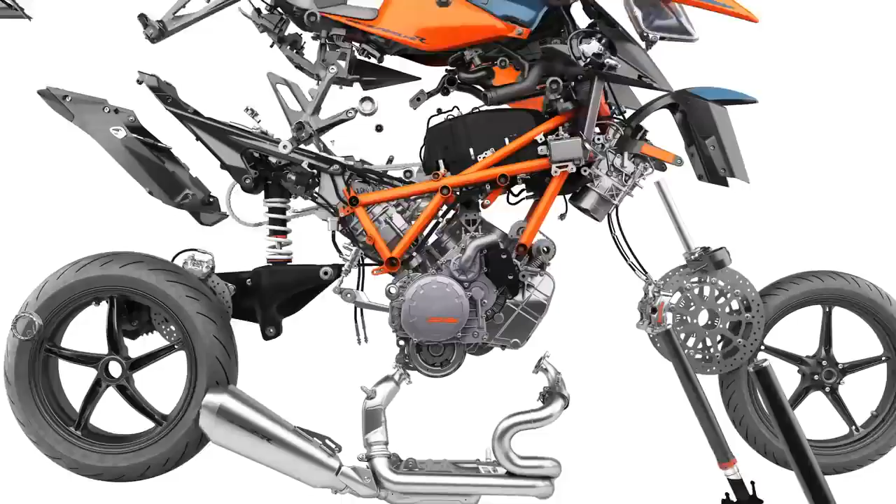Everything about the Super Duke starts with that massive V-twin engine. This is what defines the bike. This is the character of the bike. The pulsation and the power, and most of all, the torque. Figures, very impressive, 180 horsepower, 140 newton meters of torque.

But it's not about the peak figures, because you can design an engine just to deliver a peak figure and really not perform very well everywhere else. Our focus was to make a very performing engine that delivers that torque and that power when you need it.

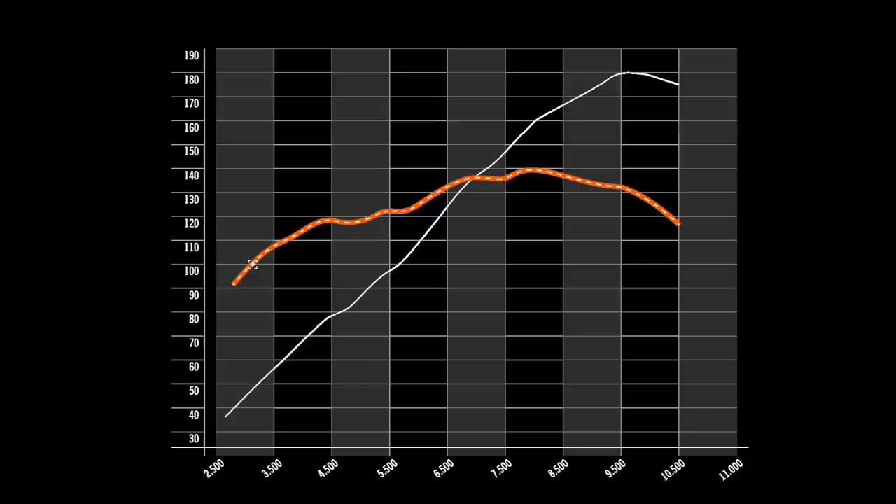If you look at the graph, you can see that we already developed well over 100 newton meters of torque at 3000 RPM. And we pull all the way through to the red line. So this makes the bike super rideable, and it gives you a big advantage on the street and on the track. Adrian, you spent a lot of time riding the all-new Beast on the street. How do these figures translate into street riding?

What I really like and what I really enjoy about the Super Duke and about this engine in particular is that it gives me the flexibility to ride. I don't have to be in exactly the right gear at exactly the right RPM to overtake. I'm free to ride how I want, when I want.

It's a street, so there's always going to be traffic. So I'll be sitting behind the car and I have to overtake in a short time, and I have the flexibility, I have the torque. I can open up and just overtake the car. And if I want to exit a corner, I have the torque, and it's just that excitement. I can't always ride full speed on the street because it's not safe, it's not what it's about, but I can just have fun.

I spent a lot of time on this new bike on the racetrack, and again for me it was a bit of a learning curve. The first couple of sessions out, I did what everyone would expect, which is to go down to second gear for the really tight corners. But because of the massive amount of torque, I quickly realized as the sessions progressed that third gear would probably be the better gear.

And the benefit there for me was really one less downshift going into the corner, and obviously use the torque to drive it out the corner, and again one less upshift coming out of the corner. So real benefit using the torque on both track and street. Big changes on the bike. There was a goal on weight saving.

The goal was 15% weight savings on every part. Of course, it's not possible with every single part, but if we slice 15% off every part, the whole bike becomes much lighter.

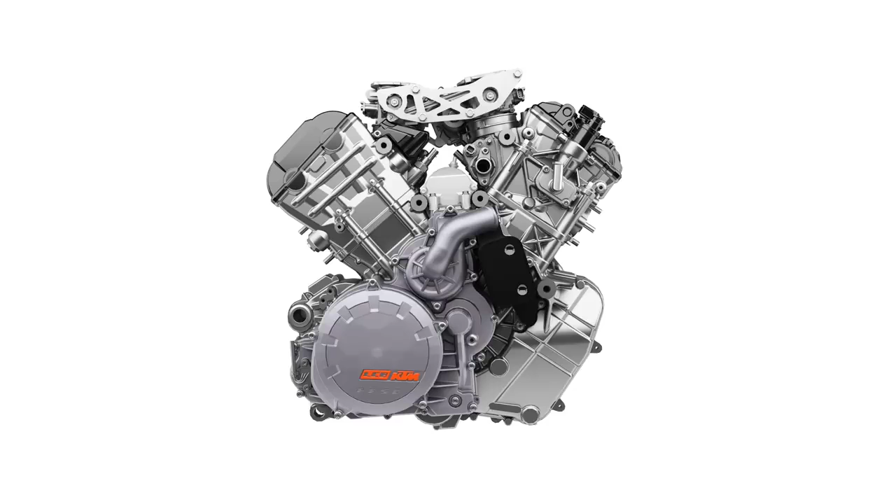Starting with the heart of the engine, one of the parts we looked at for weight saving was the engine casings. We shaved off unnecessary aluminium on the inside, saving about 800 grams.

Another big change is the pivot point in the engine. It's only 5 millimeters, but this has made a big change in how the motorcycle behaves in the end.

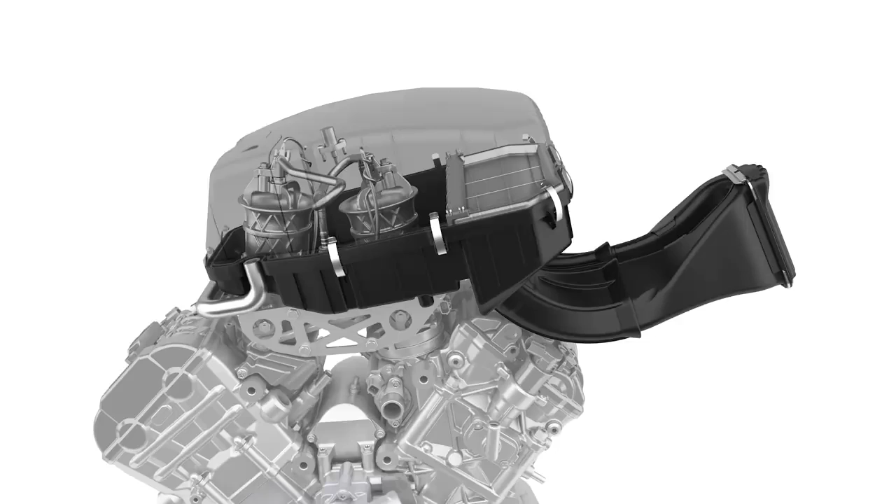One of the big changes on this bike is the new airbox, so let's have a look at that. We've increased the volume by 2.8 litres, for an overall 10 litres of airbox size, but there's quite a lot of detail in just the airbox.

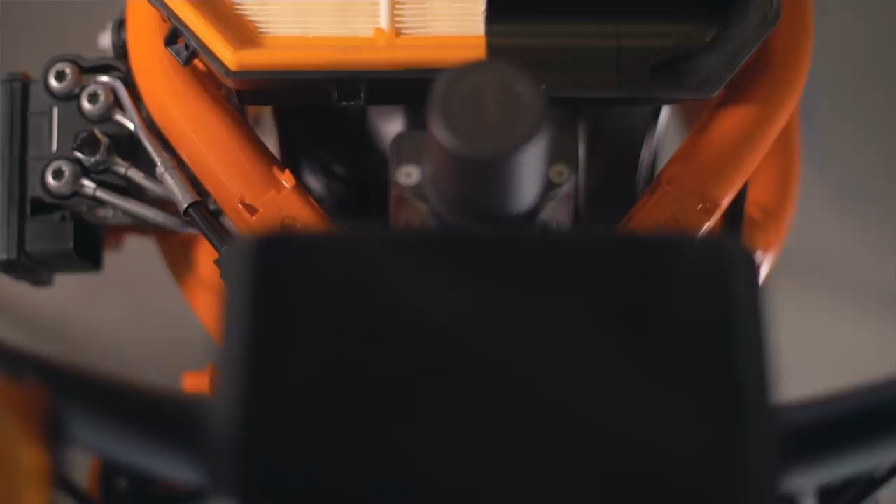One thing that's very obvious when looking at the bike is that the air intake is now in the middle of the LED headlight. This does two things. First, it combines two functions, something we like to do at KTM, so the incoming air also cools the LED elements.

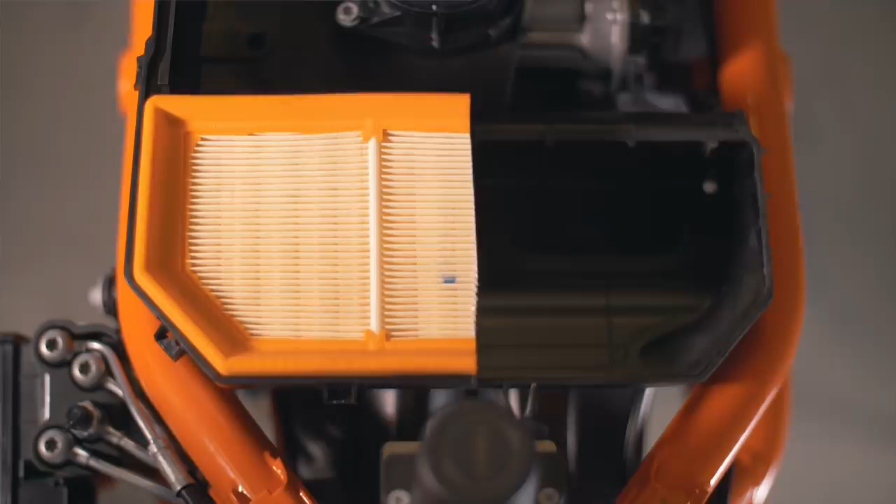The second thing is by having the air intake centralized, it gives us almost a ram air function. If the air intakes are on the side, the air can rush past and not all of it makes it into the airbox. Now it's in the middle, so you always have optimum air pressure inside the airbox.

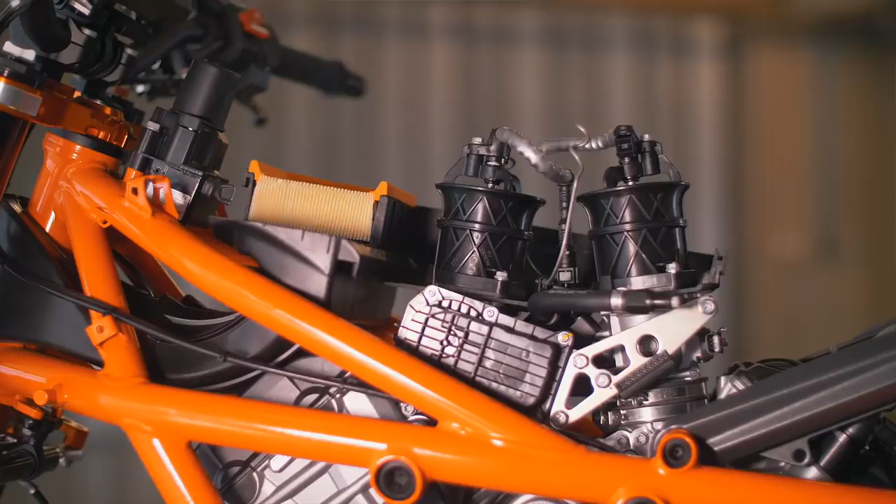On top of that, we've now got top feeder injectors inside the airbox, which allow the fuel and air more time to mix, so we have an optimal fuel mixture inside the combustion chamber. Which is also why we have the very nice smooth power and torque curve.

Let's move on from here. As we said, the bike needs to breathe like a beast, and I think we've achieved that with the bigger airbox. It also needs to growl like a beast.

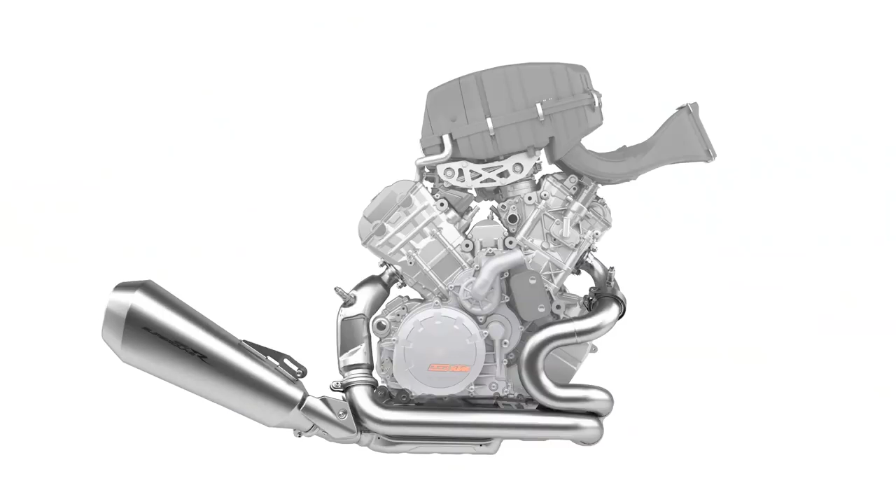So there's a big change on the manifolds and the exhaust system itself. We've increased the diameters to 54mm on the front header pipes and 60mm at the back header pipe. But we've also included some hardware because the all-new Super Duke is Euro 5 ready.

What does that mean, Adrian? It means that all the hardware needed for the next step of homologation in Europe is already on board. So we added the second catalyzer, and of course this adds weight.

So our goal of reducing weight was very challenging on the exhaust side, but we still managed to reduce the weight even with the additional hardware. This is a very impressive feat by our engineers - a total weight saving on the exhaust pipe of 1 kilogram, although we still added more hardware to the bike.

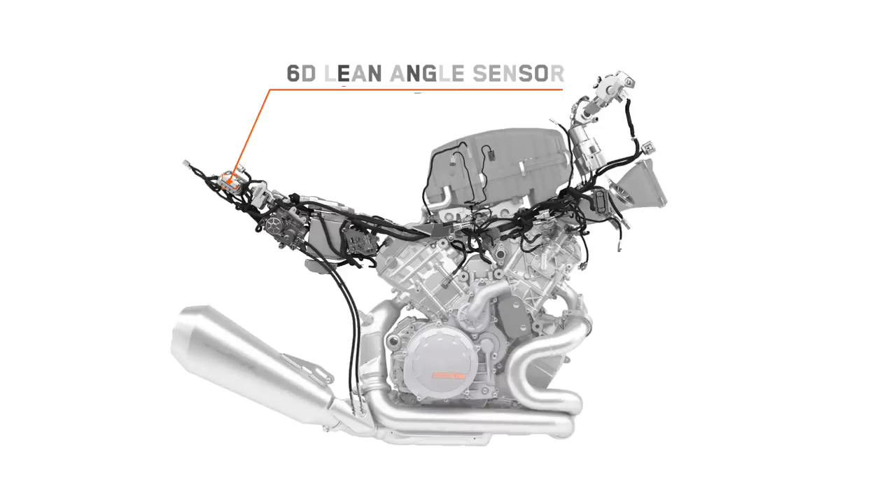We've introduced a new sensor in the bike, a 6D lean angle sensor. KTM was the first company to have cornering ABS, and of course we haven't stopped since we introduced it, so we're continually developing our ABS and traction control systems.

On the Super Duke now, we have what is called a 6D lean angle sensor. It doesn't just measure side to side, front to back movement, but it also measures the yaw rate of the bike. This allows us to control in much finer increments the way the traction control and ABS functions.

But you don't have to take my word for it, because we've taken our tame racing rider, ex-GP racer Jeremy McWilliams, and asked him a couple of questions about whether he's happy with the final result and what in his opinion are the big changes to the bike.

I'm pretty happy because I've been involved with the project right from the beginning. I think the biggest difference for me is that everything on the bike's improved, so everything from suspension to traction control, cornering ABS. I think how the new logic on the traction control works gives the rider much more feeling, and with the new lean angle sensor, I think we have far better control of throttle to the rear tire. So I can't really fault the bike in any way.

It's a wheelie machine, it's a bit of a hooligan when you turn everything off, but at least we have all the levels to keep everybody that doesn't want to necessarily wheelie safe and sound. The anti-wheelie mode, keep it on. It doesn't interfere with the riding sensation. It's a lot of fun. You still get a little bit of a wheelie.

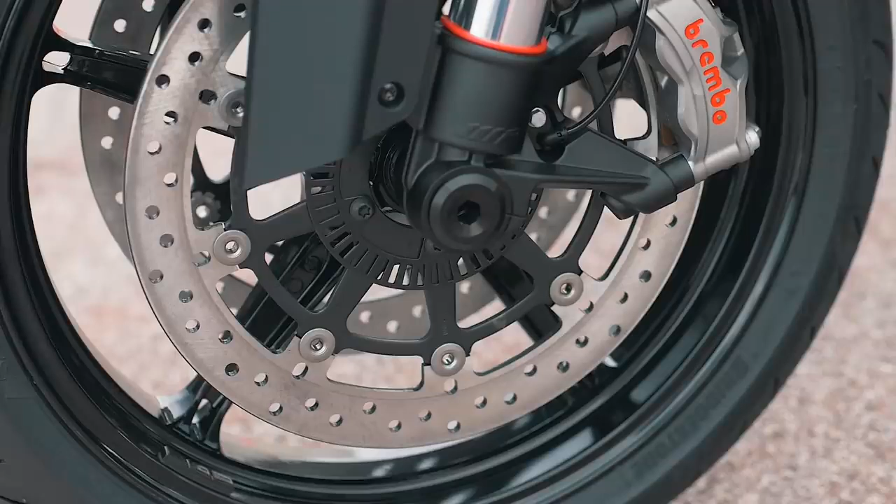Always improving on our ABS, and one of the things we improved was the feeling between the rider and the ABS system. Especially for me, Supermoto ABS was an eye-opener on the racetrack. This allows me to brake really late. It also allows the rear wheel to pick up off the ground because it doesn't monitor the rear wheel speed. And of course, on a racetrack this always happens from time to time, but yet I still had full ABS functionality on the front wheel in case needed mid-corner.

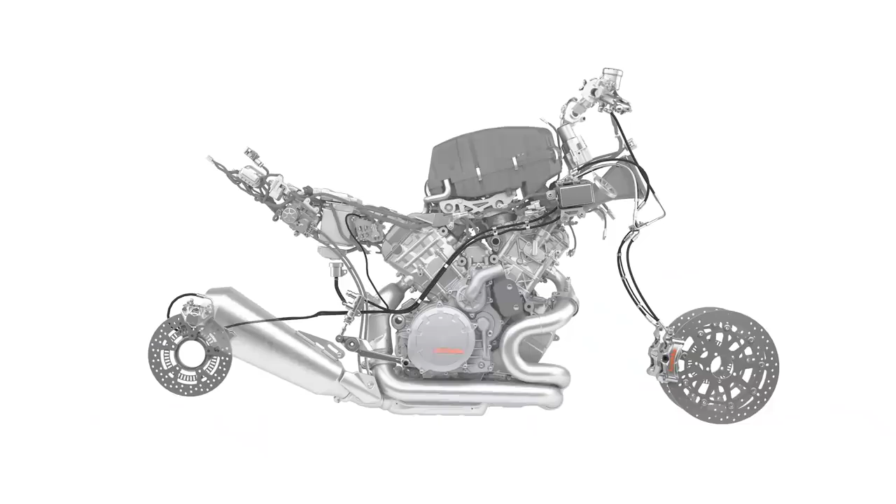Big talking point for us, obviously, is the new chassis. The frame is three times stiffer. We've achieved this partly by integrating the engine as a load-bearing part of the frame. Generally speaking, a stiff chassis is associated with racetrack performance, but for us, since this is a street bike, it was super important to keep this street riding character, that you have the flexibility to feel what the bike is doing on the street and keep the control that you have on the street.

I have to ask, is this an RC8 frame? No, it's not. In essence, there are some visual similarities to an RC8 frame, but it's a completely newly designed frame for the Super Duke.

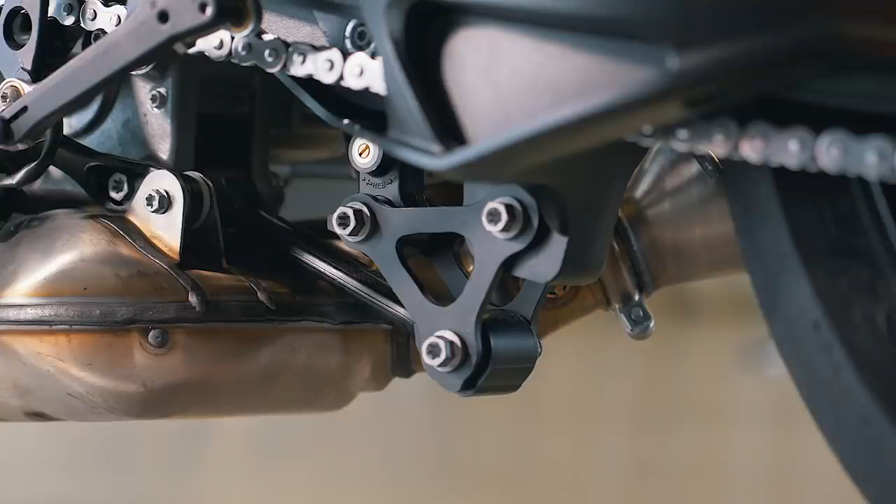Of course, for us, another key update is moving from direct mount rear shock to a linkage at the rear. This, combined with the frame, really starts transforming this bike into an amazing machine. The shock is now connected to the swing arm with a linkage system. This allows us a lot more tuning on the progressivity of the suspension. It also allowed us to use a lighter weight spring because the spring rate doesn't have to be as high as it would on a direct mount, giving the team a lot more possibilities to play around with different settings on the bike.

We mentioned the swing arm pivot point. It's been moved 5mm higher in the engine casings. The swing arm itself is also 15% stiffer.

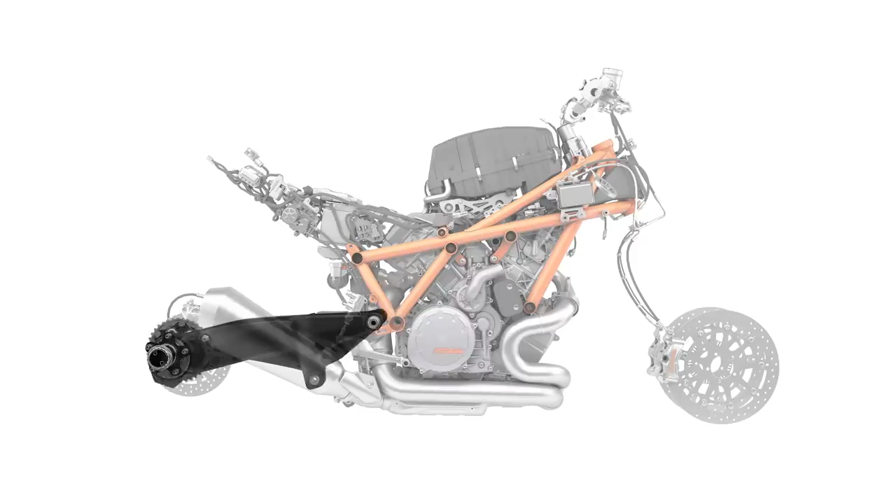Let's talk about squat and how that translates into riding. A lot of effort was made into reducing squat on the Super Duke. What squat means is that if I accelerate, the bike tries to pull the swing arm up, the whole bike squats down in the suspension, and in an extreme case this means the front wheel can get light and I don't have the feeling I want from the front wheel. So a big focus of the team was to keep the drive out of corners, done by increasing the angle of the swing arm so it's more in line with the driving force of the chain, giving more forward drive and less squat into the suspension. The benefit here is you can be on the accelerator and still hold your line without having to come off it. Really, really big key update here.

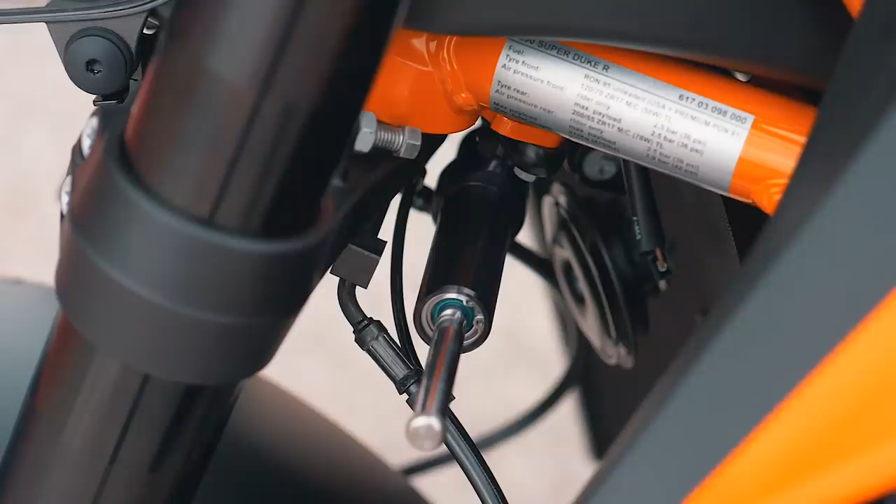As we mentioned, a lot of changes on the bike. In total, 90% of the bike is new. So let's look at another change. It might seem quite small, but on the triple clamps we've made a big improvement as well, saving 230 grams. This was achieved by changing the steering tube to aluminium - it used to be steel. We've also changed the offset slightly.

So it's now 32 millimeters instead of 29 millimeters, adding to the characteristics of the bike. So we've got the frame, we've got the swing arm, we've got the rear shock. Let's have a look at the front forks, because again, big changes there.

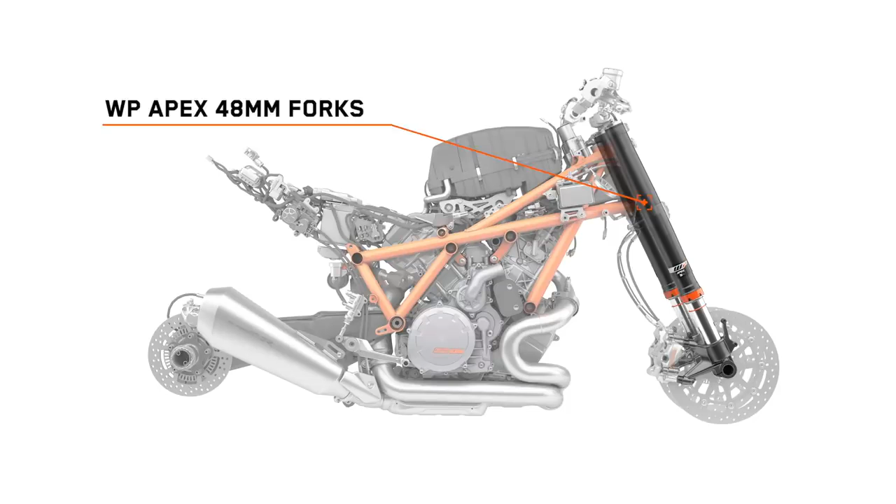48 millimeter WP Apex front forks, split functionality, compression on one side, rebound on the other. Really good for street and track. You also have the option to change the preload, so if you're riding from home to the racetrack, you can turn the preload up, and vice versa going back home.

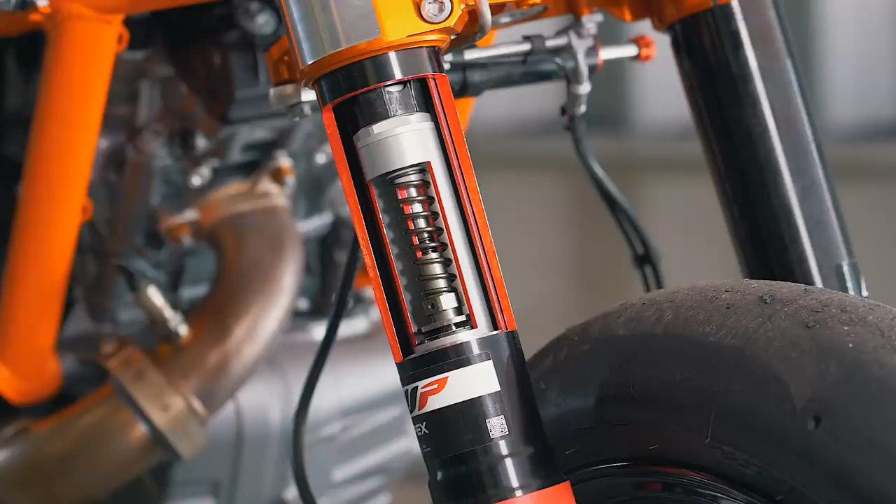Larger cartridge, so you have more damping volume, so we can control the damping better. I think this was really key for us, also keeping the oil temperature low. Just by increasing the volume size, for avid track users you can also keep the heat as low as possible.

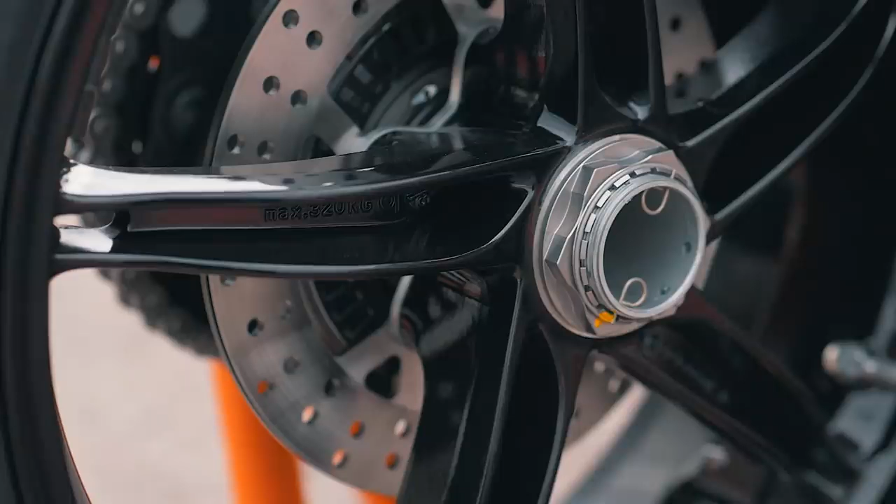Let's have a look at the wheels, because again, completely new. Give us a bit of an insight. I know there's a lot of computer generation that goes on, CAD drawing. The way the wheels are engineered is quite an interesting story, because what we do is feed the data into a computer that calculates the necessary material.

We want wheels of a certain stiffness, a certain weight, a certain strength. The computer tells us how much material we need and in which positions. Once this is done, the designers can use those components and spaces to design the wheel around. So it's not a question of designing a nice looking wheel and then making it strong enough. First we look at exactly how light it can be for how strong it has to be, and then we design it.

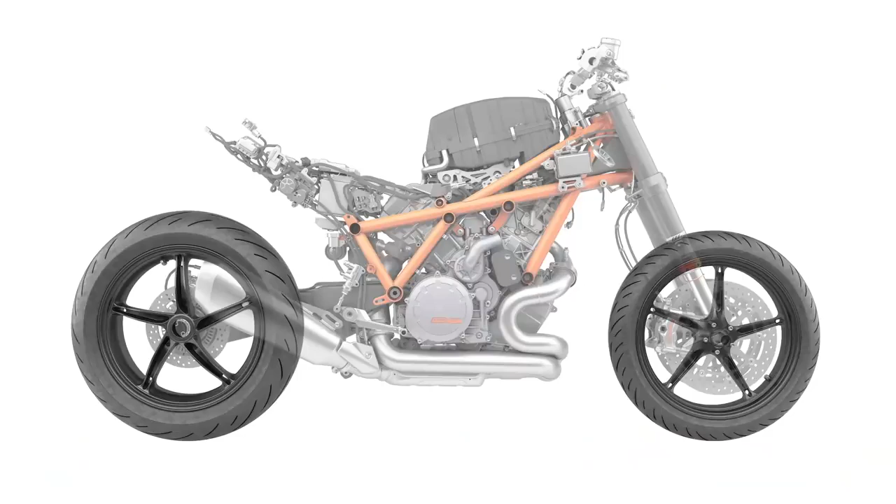Let's talk about the subframe. This is something that really excited you. Yeah, exactly. A subframe isn't usually one of the first highlights you talk about on a new motorcycle, but in the case of the Super Duke, what we've done is really interesting.

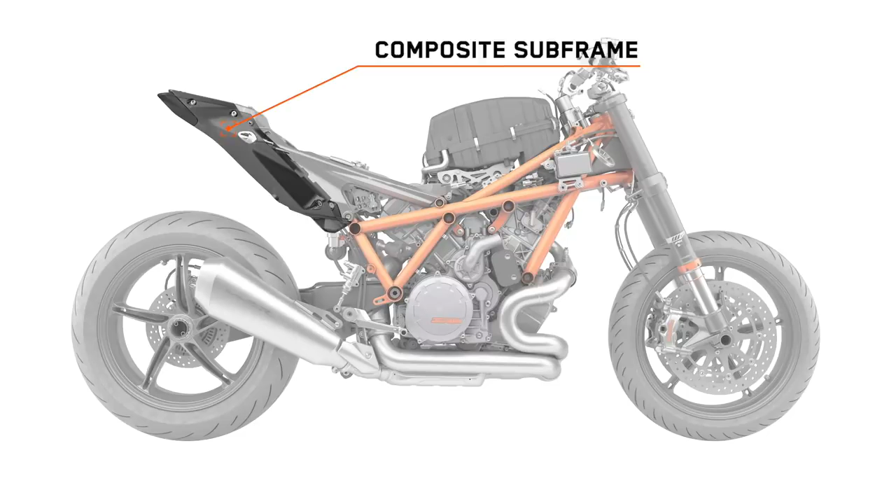The first part of the subframe is cast aluminium. The second part, where the passenger sits, is a carbon composite part. So it's not a plastic cover over a subframe, this is the actual subframe you see. Super exciting technology, and it helped us save a lot of weight off the entire motorcycle. Total weight saving on the subframe is 1.2 kilograms.

All additional parts that need to be mounted to the motorcycle, like the number plate or the passenger foot pegs, mount directly to this carbon composite. There's no additional brackets needed, and I really like that.

Adrian, our bike is starting to finally look like the complete package. Let's add some of the ergonomics and finish off this beautiful motorcycle. Position-wise, we wanted to keep the characteristics of the Super Duke, a comfortable bike to ride, really upright.

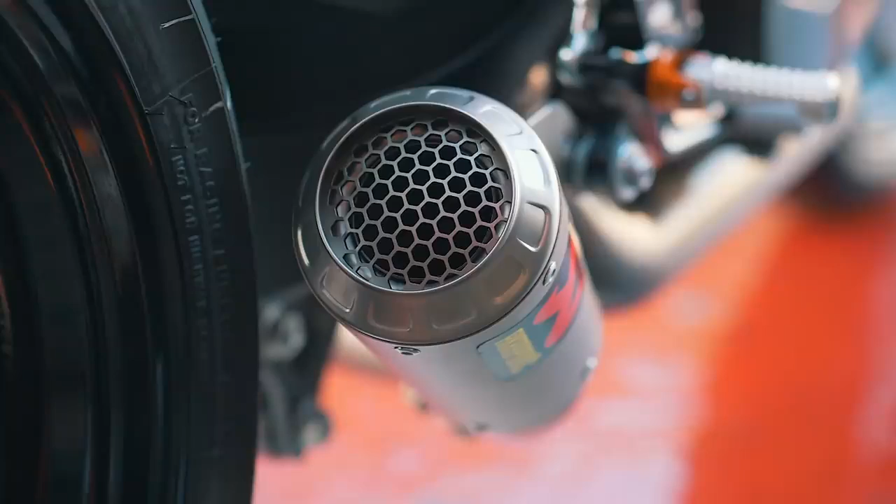This motorcycle we have here today is dressed fully in power parts, which is available through your nearest dealer. But standard fitting has a lot of possibilities too. We spoke about bar position, and something I really liked is that foot peg position can be altered on the standard foot pegs.

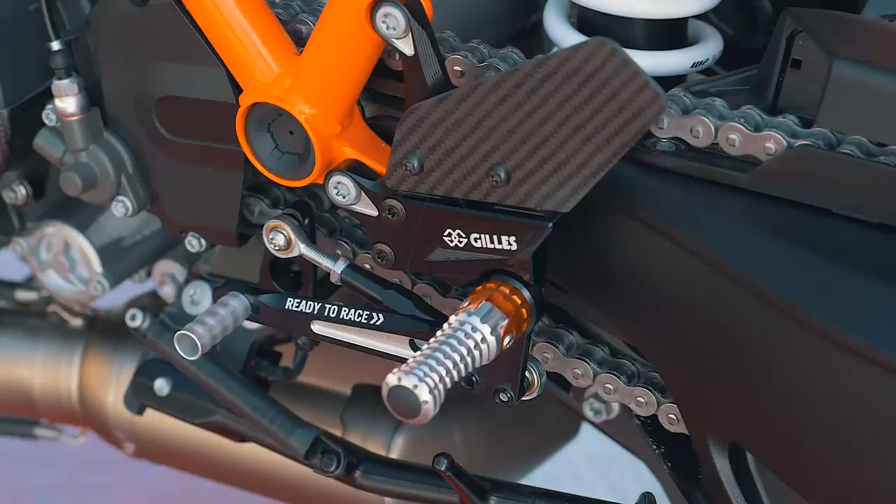And for those who like to go to the track, you can also shift the gear selector from normal shift to race pattern by simply moving a bolt. No additional shafts or parts needed to do that.

The presentation today is a bit on the short side, so we can't touch every single part of the bike as much as we'd like to. We could talk here the whole day. We have a new TFT display, brand new switches on the handlebars, this beautiful paint on the bike. There's so much to talk about, but yeah, I would say just go to your dealer and check the bike out.

Just to recap, the all-new KTM 1290 Super Duke R is a torque beast. It is the ultimate naked bike, and of course it has an all-new chassis. We suggest that you get to your nearest authorized KTM dealer to test ride the new beast, or visit our website to book a test ride.